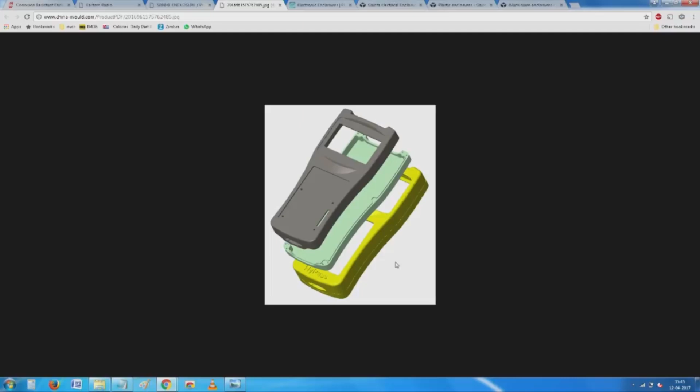If you remember the very early drawings I showed you, invariably had things from here. You see here very carefully, there are 3 or 4 variants of it. There is a bottom, there is a top. The bottommost shows how it is put together, and I do not know whether it's a matching plate. You try to, now you can build your own equipment directly on this. All you need to do is try to understand these things.

Only problem is, they are not as inexpensive and easily available as we think, as we would want to. So most of us know, now slowly things are becoming...

Wearable, anything you want - biomedical, energy harvesting, and something to track your movement. You want it, is it not? The more you think about it, we have absolutely seen this, no? Anything you want is probably already somebody has thought about it.

Interesting life. Wish it was there when I was this thing, no? Right now, it's very, very easy for you to try to configure, make any of these things as you want.

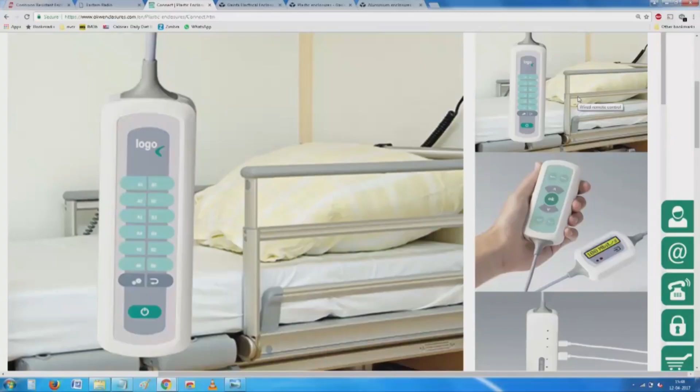It is some remote control. You see at the back, this seems to be part of a bed meant for hospital equipment. Only if you are ever admitted in a hospital, or if you have gone and visited friends or relatives who have been in a hospital, you will discover that the environment has changed, and so is the requirement of safety and shock proofness in all those places.

Even the simplest bed is powered. You do not have levers, somebody can press up and down, or you need to crank up levers. Instead of cranking, we have various types of remote control.

So while a wireless remote looks good a lot of times, it's not as convenient, as simple, or a best solution you can think of, because the ultimate - what if the remote loses power, and what if it gets spoiled, and what if you drop it? All this can be taken over if you have - all that you need is a wired remote.

You have a beautiful wired remote here, and because it's a general purpose thing, they are just trying to show the overlay panel in which you would like to make things more and more visible here. You have seen this. So probably it is just the next level.

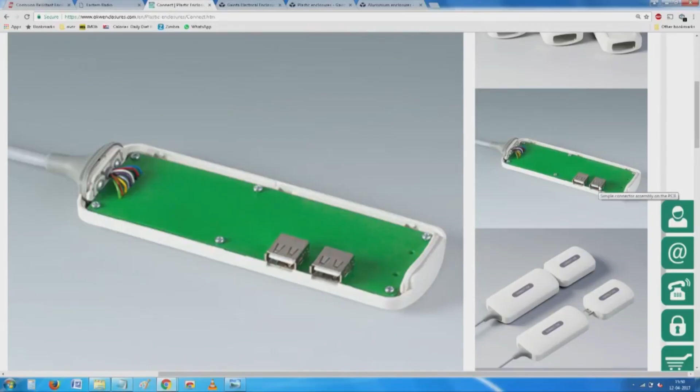I am not yet ready for function keys and a menu operated and so on, but let us say if you are a trained technician, or if you are a doctor who have no choice but to train yourself, probably you will use it. As we are coming here, you see many more things are ready.

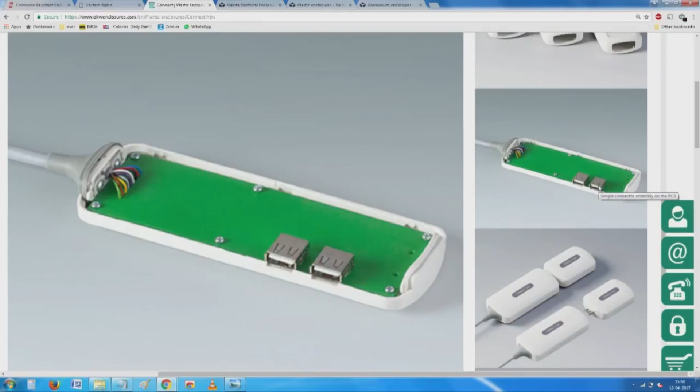We already have a box, whatever you are thinking about now, where two USB socket equivalents are already mounted there. So it's for you to go about trying to use this as much as possible, and now you have a full-fledged piggyback or daisy chain riding type of things.

We think of medical as generally only that which is there in a hospital, but slowly several of these things are coming home. You need not go all the way to a hospital, or you may go to a smaller primary health clinic where you are asked to build these things. The simplest thing I can think of is a simple blood pressure monitor. The cheapest ones cost, I expect, around $50, and a good one costs about $200 to $300. The magic thing is they're absolutely repeatable and safe.

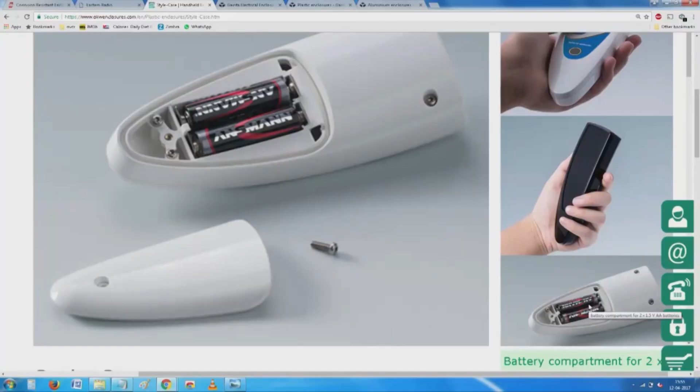Now you see inside, already it comes with things which are built inside. Compared to some of the now very low cost things which are likely to buy for a few hundred rupees or a couple of dollars, these things are engineered perfectly well. One is material compatibility, so they are unlikely to rust, and then even if you examine the way that cover seems to sit on the battery case, it ensures that there is lipping which provides for proper grip, and then you see this, it definitely is ergonomic. There are no sharp edges, nothing is likely to hurt you, and then a bit of design has been built into it.

So you have, I do not know, something showing 13.8 and 93 and 69 and so on. It is just a simulation. You have them. So next time when you attempt to make anything, I suggest you have a look at all these catalogs, so you will appreciate somebody has been doing a lot of homework around these parts that you require.

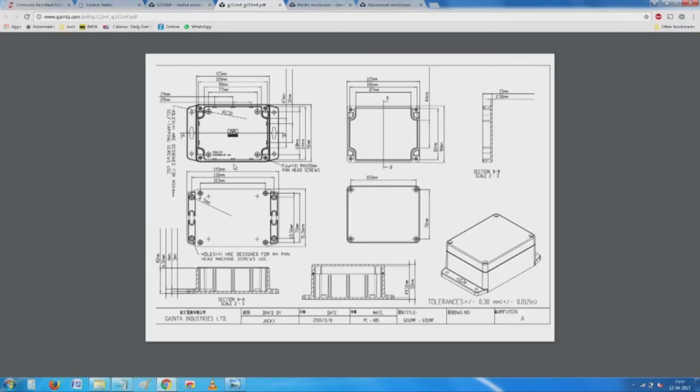So two of them I would like to touch upon are these. You see this beautiful enclosures which have all the features like the other ones, plus they also come with flanges such that they can be mounted easily, and more than anything else, application data for a packaging engineer—this application data is very, very critical for us.

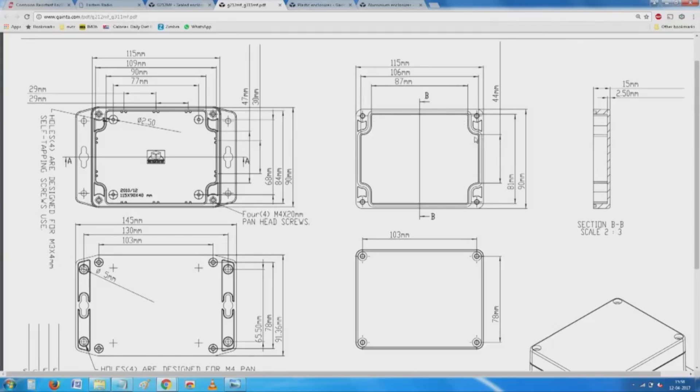Every small detail showing what comes on top and what comes here. If you were to make any detail occupy this space, you see here I have a place of 87 mm. So something which is 87 mm or maybe 85 mm wide by around 80 mm can be put like this. Alternatively, I can have something smaller. Otherwise, if I notch off these corners, I can have a PCB which sits nicely inside.

Somewhere there are also grooves in the walls. I can see that things can go and sit in the grooves in the walls, and then all sorts of provisions of mounting, the full drawings are available to us. So I like this. Again, I am not endorsing any one particular manufacturer, but I see that the easy availability of this information, and then your chances of being able to deal directly and make your products ready for the market is something which is very, very positive.

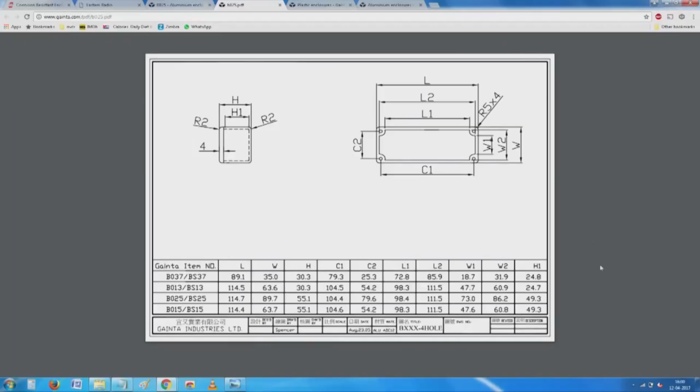I am now suddenly with the new economy where this data is easily available. All of them come with that star saying they are copyright, so we cannot randomly go and start copying these things. However, this is application note, and you can always depend on these suppliers for you to make wherever you want to do.

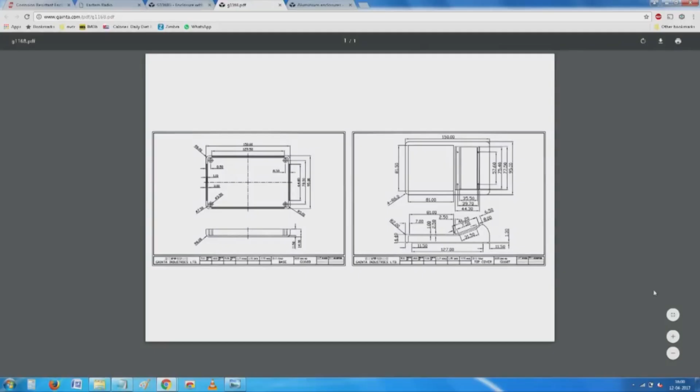So this is again one of my favorites which I have used elsewhere earlier. I'd like to show you this small enclosure. See here, it makes life extremely easy and convenient for me here.

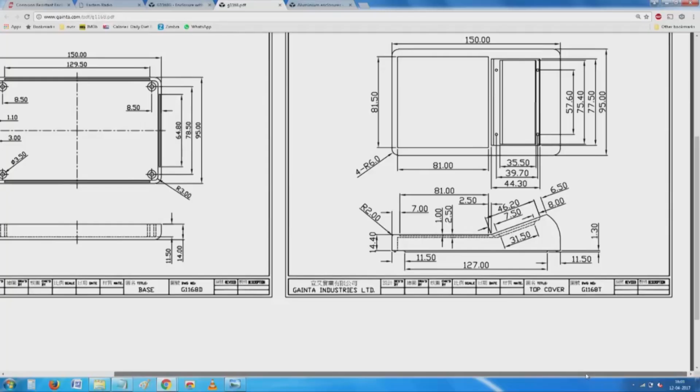So I have here a place for a keypad which is approximately 80 mm by 80 mm. Then I have a place here for a small window. If it is an LED, it can be probably a transparent window, or in some very rare cases special windows are available. And then at the back, there is enough place for us to put a 40 character 2-line general purpose display, or a full completely accessible pixels type of display, and such things can even be used for building anything. If you are one of the students who enjoys making, this is the place.

And then you see here I have even a more beautiful enclosure which appears to be easy for me to hold. In one of the very earlier lectures, I showed you how you would hold it, how the width of it has been controlled. In this case you have a display which is slightly wider than your grip. So you have already a standard enclosure for it, and if you can lay your hands or even order them online, you are already in business.

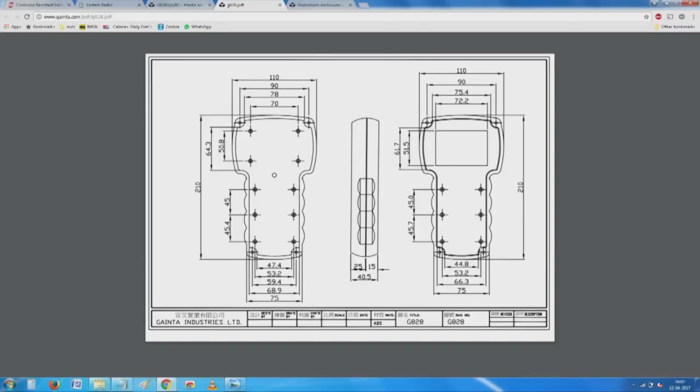If you are one of those new startups who would like to demonstrate your capability of designing something, you can probably become an enclosure design person. So other people can come to you, you can have all this, and the total turnaround cycle for the first design becomes easy. Anything you want, you can just look up on the enclosures here, and eventually even if it is a very, very complicated design, you can have it all ready.

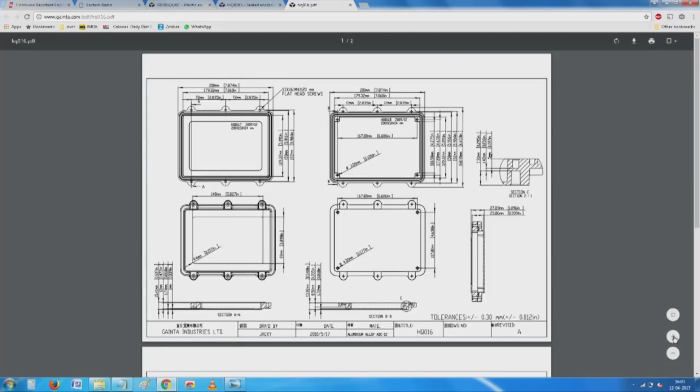Seen this? I cannot imagine anything more informative. It could be anything. Let us say you wanted to monitor energy usage in the house, saying how long a particular air conditioning has been running, or how warm or how cool it feels, and then you would like to make an equipment. You just need to lay your hands on one of these enclosures, put all the necessary sensors, electronics, everything, and then the best part of it is all of them come with necessary hardware which will make sure of input and output connections.

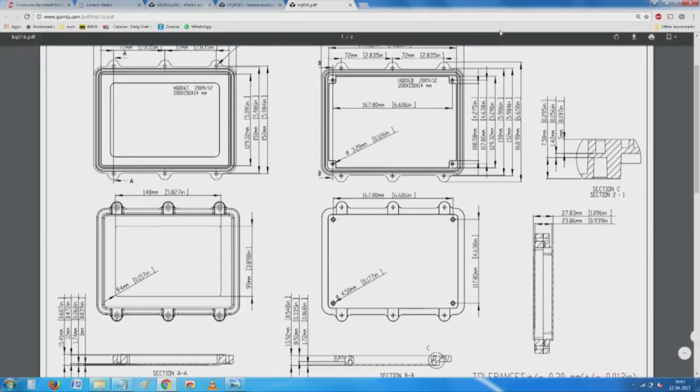Input and output connections and all through various types of grommets, various types of gland nuts, all these accessories are easily available with us. So if you click on this accessory for enclosures, you will notice that anything you can think of by way of hinges, by way of clamps, and this is one of my, what I will say, favorites.

Which often engineers or students and engineers are likely to miss. See, it's very interesting if you see a little closer at this drawing.

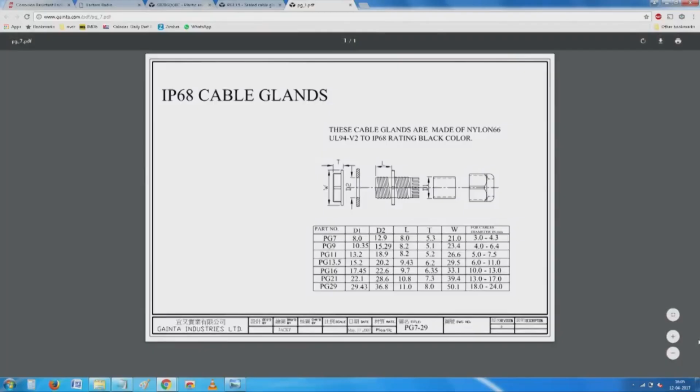Hey, it has something. There is a nut-like thing here, then there is something here, then there is a washer here, and something else here. The whole thing is an opening to take wires in and out of your enclosure.

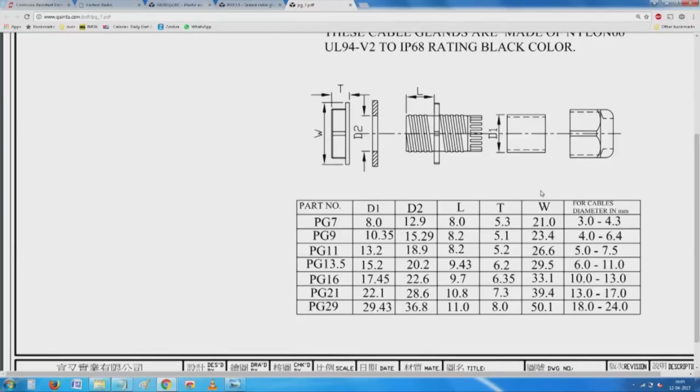You will see that while part of the environment is very comfortable and nice to see, part of it is not that easily known, because once it is installed and placed, nobody touches it, everything is fine. But the first time something is opened and you try to put it back, you will notice that it leads to some amount of failure, some missing out on a few of the hardware pieces and so on.

But if you look at a place like this, a gland nut, a cable gland, any size you can think of is already available for you. Then all the necessary hardware, including how to pack the gland, what cable sizes go inside, and occasionally a special type of sealing compound - not just RTV, something that also lubricates, and then it packs, it swells and stays in place - are all available.

So even for a small thing, like if you want to keep an outdoor light, garden lights, and switches for the garden lights, maybe a foot switch, you will notice that is interesting. If you depend on all these things, and follow the original sequence of assembly, disassembly, and all the design and installation guidelines, they are designed for life - things work. You will never have any problem relating to this.

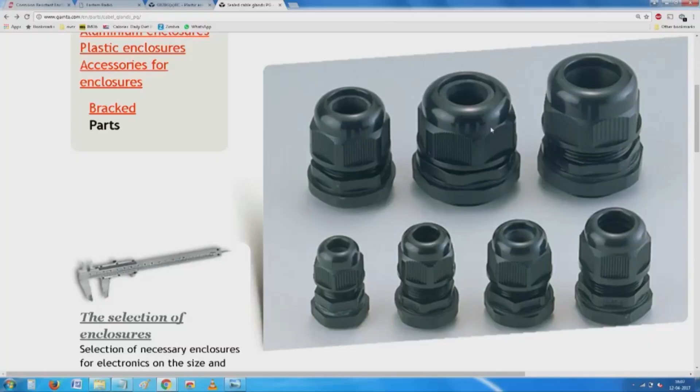As you turn this nut, that ferrule closes, and if there is a packing inside, it will go and grip whatever you keep inside. It could be another tube, it could be a silicone sleeve, and inside that you can have your cables, and it is practically watertight.

One of them is this - we have wall mounting brackets, and this is really interesting. I am sure you must have been looking for it all the time. Hey, I wish I had this - my hobby, I would have converted it into a product.

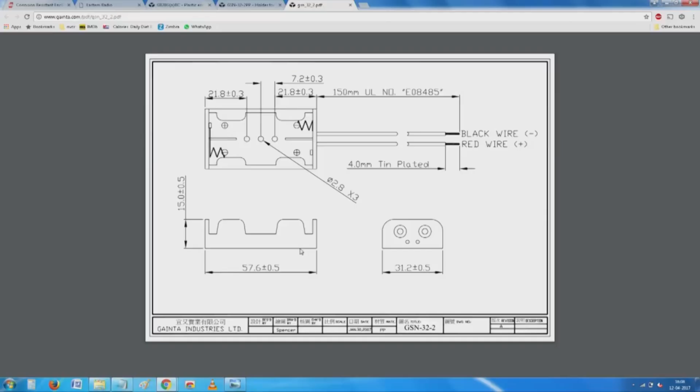Looks very innocuous, very simple - a holder for 2 cells. But then the advantage of it is reliable, and you have mounting holes, and you also have connectors, or if you want you can have wires.

What the doctor ordered, it is a compounder. The doctor used to give generic medicines, and the compounder would mix each of them and make it into something safe for you. You can't buy anything off this, there is nothing ethical or unethical about it. So we have here exactly what the doctor ordered, whatever you want is already available.

You have seen that, no, this is for 2AA batteries. So you have things meant for anything you can think of, and then you have seen this - we have beautiful handles for these enclosures. So if you have an idea, it is very easy for you. If you follow any of these enclosure systems, very quickly you can convert it into a product.